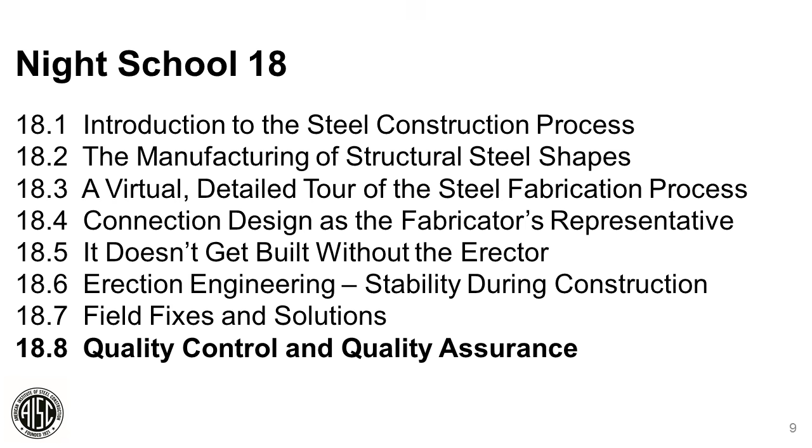One thing that really struck me is this is the last session, Quality Control and Quality Assurance. This being the last session from the mill to topping out, it struck me as unusual. Then I looked further at the AISC specification for steel buildings, AISC 360, and I looked at all these chapters and design requirements, starting with general provisions and design requirements, design for stability, design for members. And the last chapter is quality control and quality assurance.

So I wondered, why is this last? I gave it some thought, and I said, whenever you're doing something and reviewing it, usually the thing you remember most is the thing you cover last. So maybe that's why we're doing this last, so you'll remember it first when you're working on a job. Also, why is it last in the specification? So you'll remember it first whenever you're thinking about anything on a job. You'll remember quality is the most important thing. You'll also remember that steel is a very high quality product. It's the highest quality construction material on the market, fully controlled, as you've learned, from the mill through topping out.

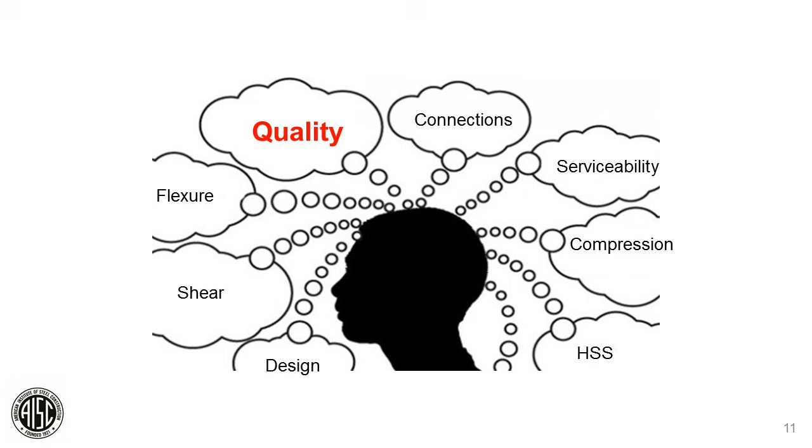So the plan for today is we're going to go through two parts. Part 1 is Demystifying Chapter N in the Building Code. Part 2 is applying Chapter N to statistical improvements. In Part 2, I'm going to show you some ways it's been applied in a fabrication shop and for erection, and how it can be used to improve quality in those areas as well.

But let's start with the first part, Demystifying Chapter N in the Building Code. Before we start, though, I want to go through what most people understand is the typical inspection process that takes place on a job site for structural steel.

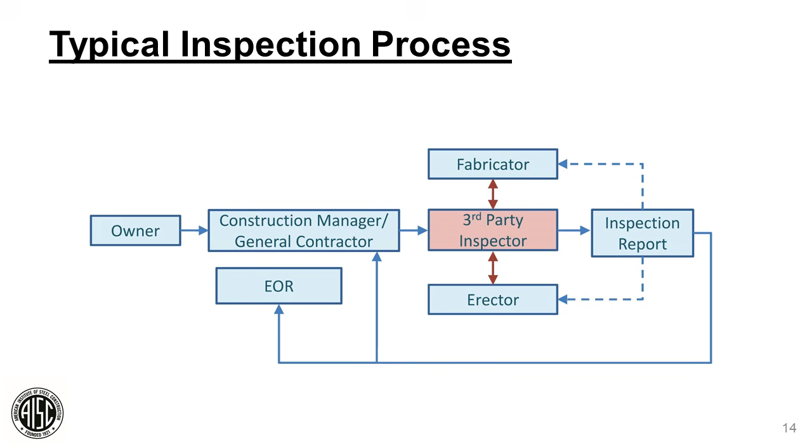So without any further ado, let's get into Demystifying Chapter N. What we're going to cover in this section is why this was added to the AISC specification, what is the source of these quality requirements for fabrication and erection, and what is the difference between quality control and quality assurance. What does perform and observe mean in Chapter N? And how does all of this relate to the International Building Code?

So why was this added to the AISC specification? Well, it was added to provide guidance of items to be listed as special inspection items and to assure consistent quality of structural steel for fabrication and erection. It also required documented quality programs from all fabricators and erectors.

So what was the background? Well, if we go back and look at the AISC specification, also look at IBC 2009, the section on special inspection in Chapter 17 had 20 pages with significant references to outside documents for special inspection.

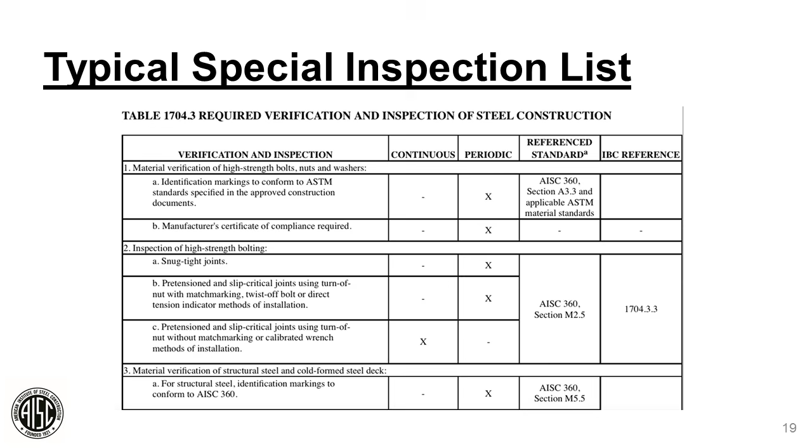This other set of drawings was pretty similar to what you just looked at. Same list, verification inspection items on the left, continuous periodic reference standards, and you're going to see all those AISC references we talked about previously, AISC 360, section M2.5, A3.3, M5.5, ASTM standards, and IBC references over on the extreme right-hand column.

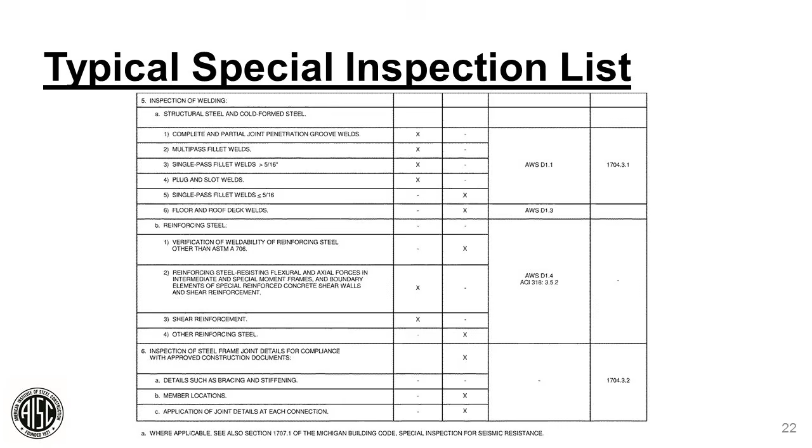Continuing on with inspection of welding, you'll see AWS references there for D1.1 and D1.3, also D1.4. You'll see that referenced as well, and the IBC references.

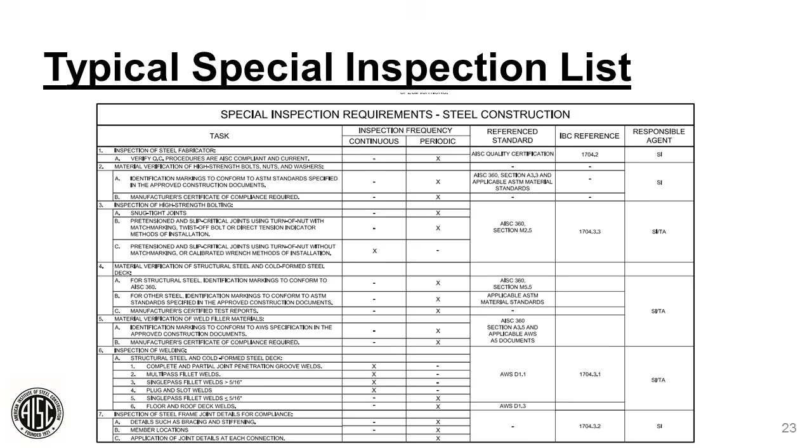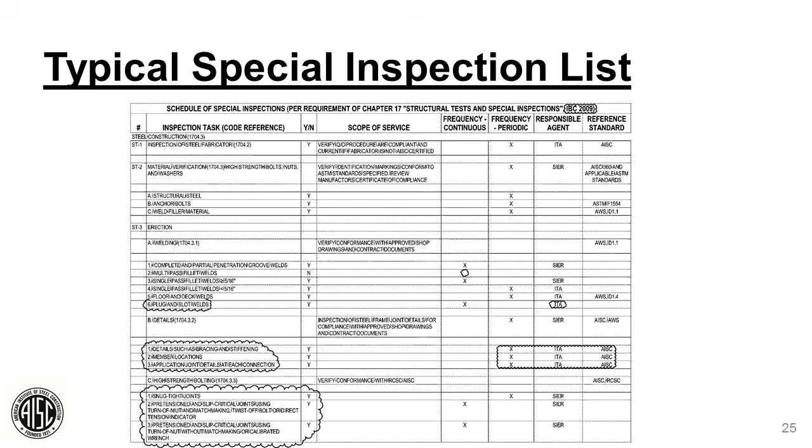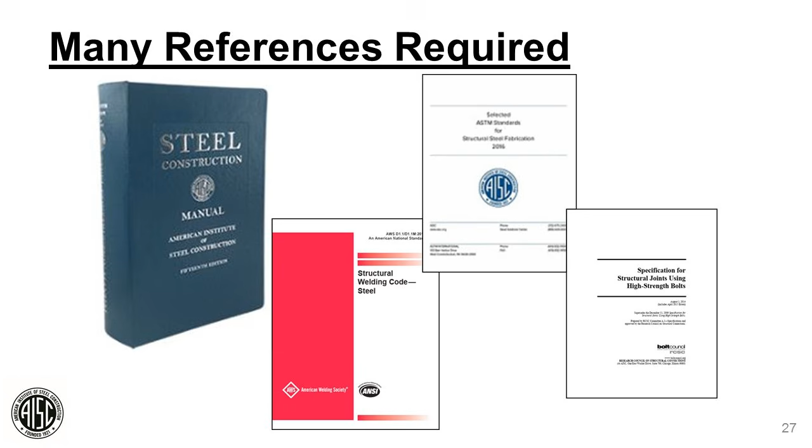So why was it added to the AISC specification? To provide guidance of items to be listed as special inspection items. So now, instead of looking at all that documentation we just looked at previously, instead of all of those, all you have to do is look at the AISC specification and Chapter N. All the references you need for inspecting for quality control and quality assurance for structural steel are in one location, Chapter N.

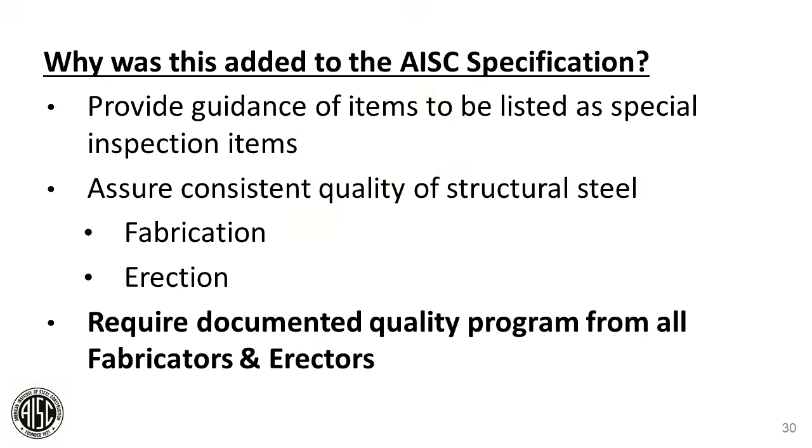It also was added to require documentation for quality programs from all fabricators and erectors. So every fabricator and erector now will have to have a quality control manual of some sort. These can be in many different formats, could look different at every company, but every fabricator and erector must have a quality control manual to say how they control quality in their shop and in the field.

So the driving question is, what was the source of everything in Chapter N? Where did this all come from? Was this all new? Well, the key to this lies in the tables.

When you start to look at the tables, you're going to see tables for inspection tasks prior to welding: welder qualification records, continuity records, WPS available (welding procedure specification), manufacturer certifications for welding consumables available, material identification, fit up of groove welds. Continuing on to inspection tasks during welding, you're going to see all these items listed as quality control and quality assurance items with either an observe or perform.

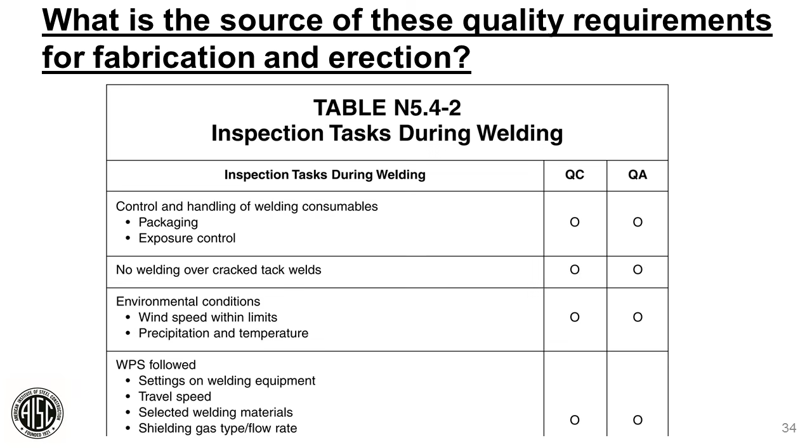Then inspection tasks after welding: welds cleaned, size, length, and location of welds, welds meet visual inspection criteria. This is all listed clearly in Chapter N. But where did this come from?

Well, the key is to look at the commentary. When you go back and look at the commentary for table N5.4-1, you're going to see that all of those things listed were taken from AWS D1.1. Welding procedure specifications, WPS available, is in clause 6.3 of AWS D1.1. Manufacturer certifications for welding consumables available in 6.2. Material identification in 6.2 as well.

Continuing on for clauses for inspection tasks during welding, you can see use of qualified welder, 6.4, control and handling of welding consumables, 6.2, and no welding over cracked tack welds, 5.17. They're all listed here. This is nothing new. These are items that were always supposed to be inspected while welding.

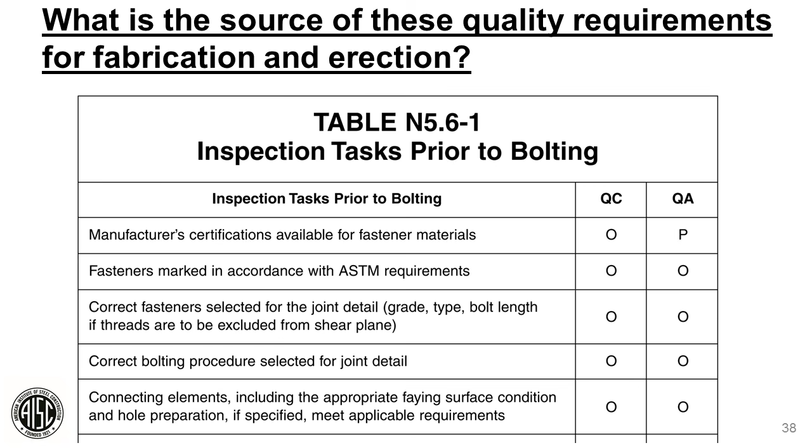Also, when you're looking at inspection tasks prior to bolting, you're going to see similar things: manufacturer certifications for available fasteners, fasteners marked in accordance with ASTM requirements, correct fasteners selected for joint details. Those were all taken from the RCSC specification for high-strength bolting, and you can see the sections that were referenced here.

Manufacturer certification available for fastener materials is in 2.1 and 9.1. Fasteners marked in accordance to ASTM requirements were in certain figures, in 2.1, figure C2.1 and 9.1. Everything is listed. Everything was taken from somewhere else. Now it's in one location, easy for everybody to find instead of using all those other references.

So let's go into this a little more detail. Let's look at how this would be applied. How are these inspection tasks performed? Let's look at groove welds.

If you look at groove welds, it's an observed task. You have to look at joint preparation, dimensions, alignment, root opening, root face bevel, cleanliness, condition of steel surfaces, tacking, backing type, and fit if applicable. Really, it's a simple situation. You look at your groove weld, how it's prepped. You can take measurements of that groove weld and make sure it meets the criteria of the welding symbol shown in the drawing. It was prepped properly before welding begins.

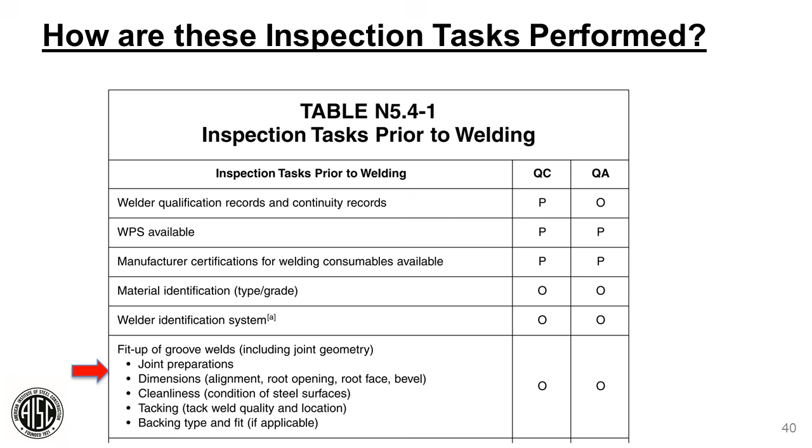So it's an inspection task before welding. If you go back and look at that again, it's just looking at these items listed on the bottom when you're looking at this joint. It's that simple.

Inspection tasks during welding are all observed. These can be observed during welding. So you have to look, making sure they're following the proper welding procedure specification, the WPS, settings on welding equipment, travel speed, all these items.

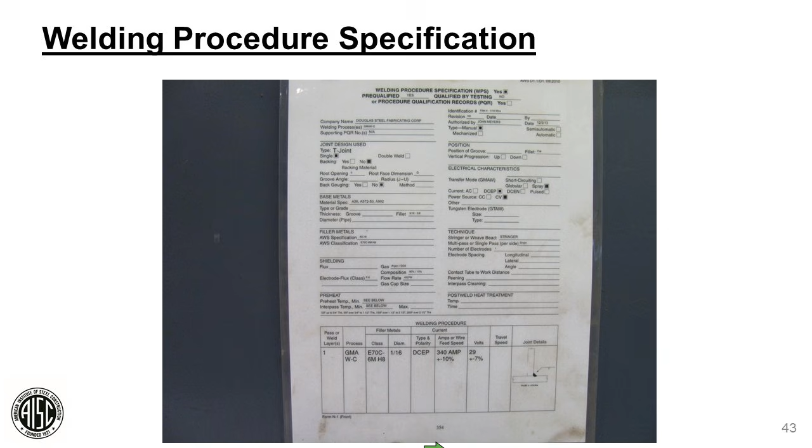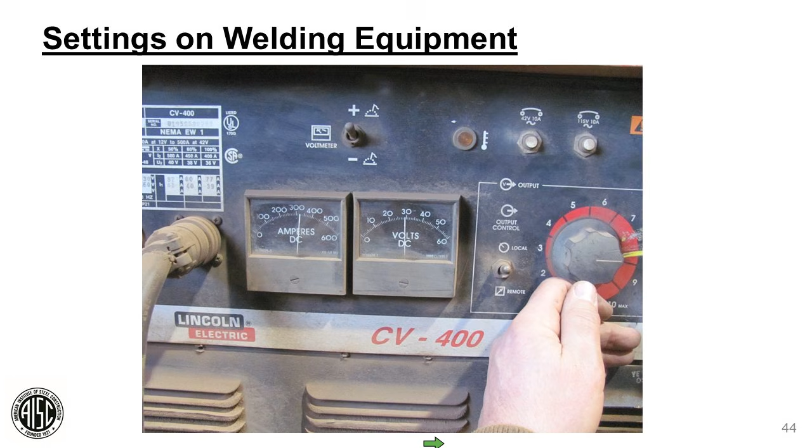Once it's filled out, every welder wants to make sure they follow all the procedures spelled out in this welding procedure specification. For example, setting the welding to the proper setting, the proper amperage is set for welding, making sure that's done properly.

Inspection tasks after welding. What do you look for at a weld after it's done? Keep in mind, not every weld is non-destructively tested. Fillet welds can be inspected visually. There is some non-destructive testing that can be done on fillet welds, but most commonly, most problems with fillet welds come out visually. For example, welds meet visual acceptance criteria.

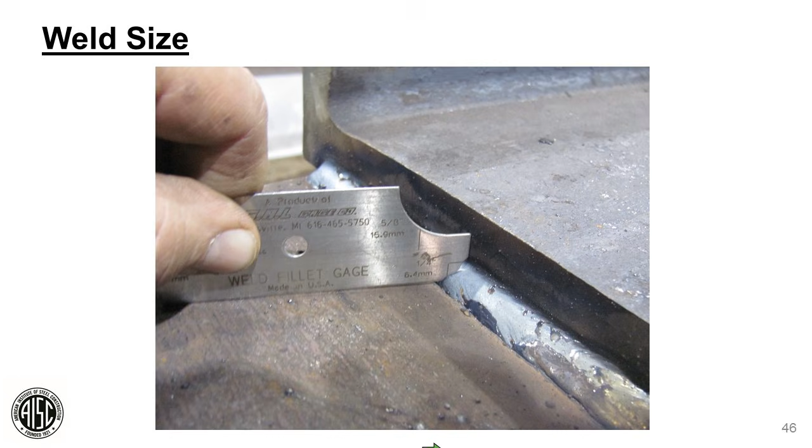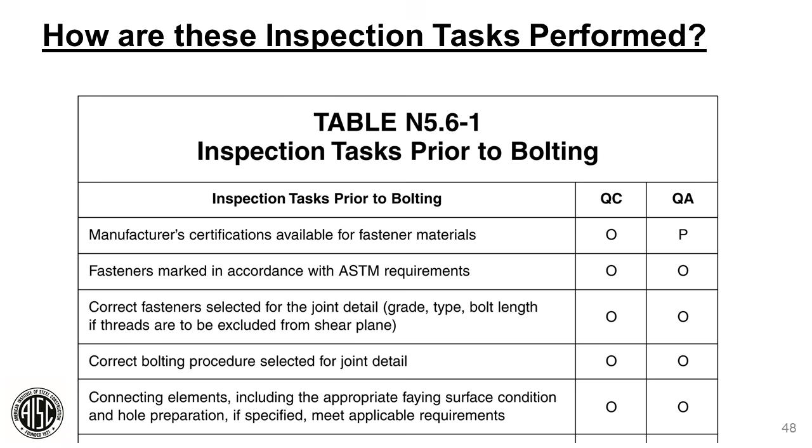Bolting. There are inspection tasks prior to bolting, and you can see there are issues here. Fasteners must be marked in accordance with proper ASTM requirements, and the correct bolting procedure must be selected for the joint detail.

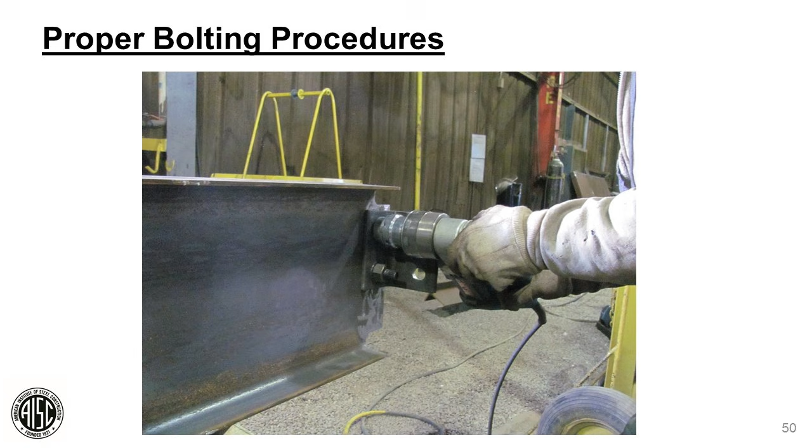So you see if proper bolting procedures are being used, and proper bolting guns are being used to tighten these bolts, you make sure that's being done.

I also want to go over pre-installation verification testing. This is required by the RCSC specification for high-strength bolts. It is required that you test 3 bolts from every lot of bolts. Now that doesn't mean 3 bolts from every keg. Every keg of bolts is marked with a lot number.

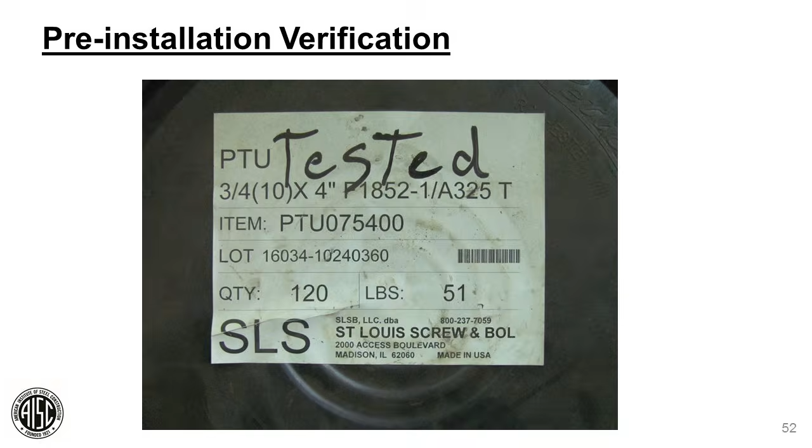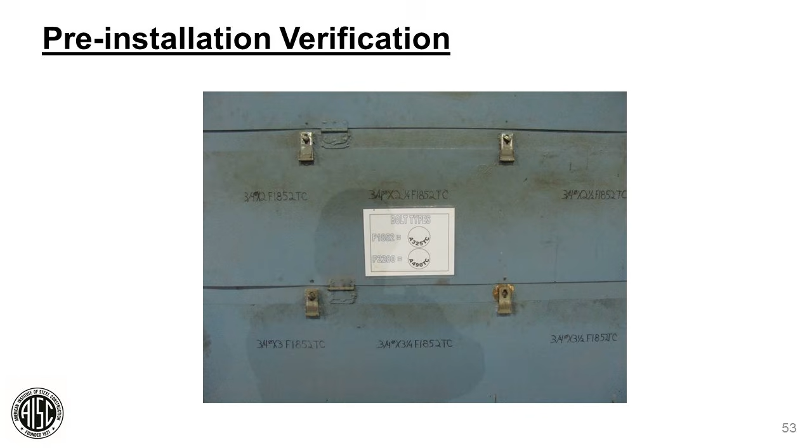When you open that container, you're going to see the bolts are in there, and take note, the lot number is listed right there. So you will be able to tell right away that it has been tested - it's tied to the lot number. These aren't just random bolts that are dropped in here.

So let's look at pre-installation verification as it's listed in RCSC. Section 7.1 is a tension calibrator. A tension calibrator shall be used where bolts are to be installed in pre-tension joints and slip critical joints. Keep in mind it's only in pre-tension joints and slip critical joints, to confirm the suitability of the complete fastener assembly, including lubrication for pre-tension installation, and to confirm the procedure and proper use by the bolting crew of the pre-tensioning method to be used. So a tension calibrator must be used for pre-installation verification testing.

But I wanted to show you that in the commentary for Section 7.1, it states direct tension indicators, DTIs - those are the washers with the little bumps on them - may be used as tension calibrators, except in the case of turn-of-the-nut installation. This method is especially useful for, but not restricted to, bolts that are too short to fit into a hydraulic tension calibrator.

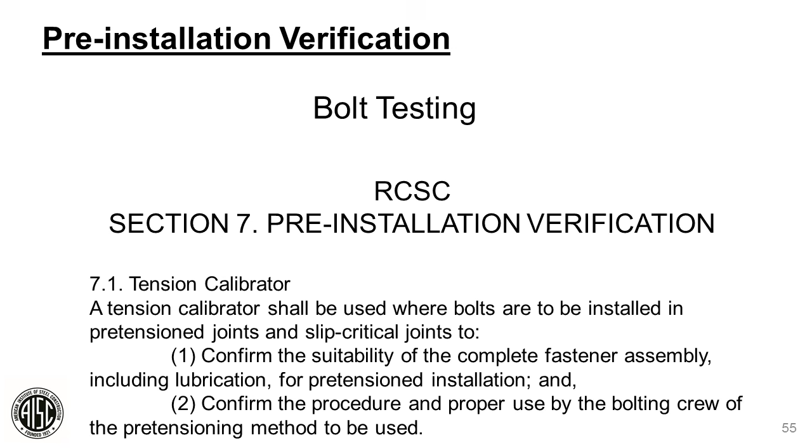So what is the advantage of this? Let's go back and look at this slide. It states a tension calibrator shall be used where bolts are to be installed, meaning on every job site you would need a Skidmore-Wilhelm device as a tension calibrator. But by this commentary, you may be able to use direct tension indicators instead.

Direct tension indicators are produced exactly the same as bolts, in lots. So what would you do? If you took a lot of DTIs, pulled 3 out of that lot and tested them in your Skidmore-Wilhelm device to make sure they got up to the proper tension, they can then be used as a tension calibrator on your job site. It saves you from having to have a Skidmore-Wilhelm device on every job site.

Skidmore-Wilhelm devices have to be calibrated. They get knocked over, they get damaged. This prevents that from happening on a job site.

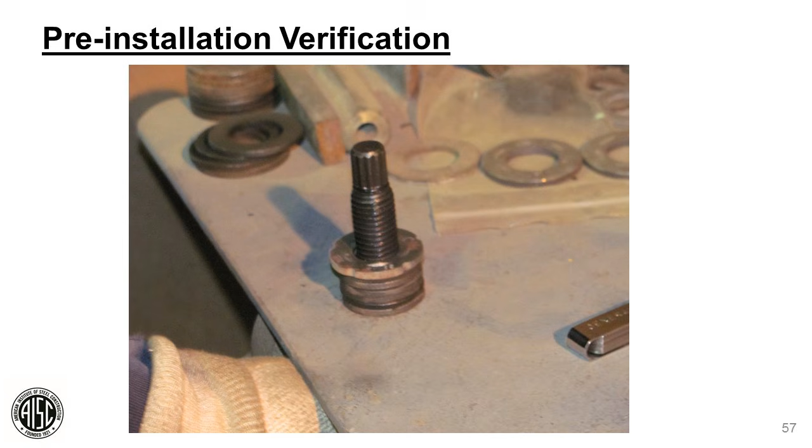So how would you use this? It's actually very simple. You take your bolt and put it through a plate. There's a stack of washers to take up the shank of the bolt, the unthreaded part. The DTI is placed on top of that stack of washers, another washer is placed on top of the DTI, and the nut is placed on. This is taken up to a snug tight condition, and then the bolt is fully tensioned.

Once the bolt is fully tensioned, you check it with a feeler gauge. The feeler gauge requires refusal of, I think, 5 thousandths of the thickness of that gauge, at least 3 points along that washer. If you get refusal at 3 points, that bolt has reached the proper tension. You've just done pre-installation verification testing for one of the bolts with a DTI instead of a Skidmore-Wilhelm device.

I want to point out this method is permitted, but it's not clearly defined unless you read the commentary. But you can still use a Skidmore-Wilhelm device if you like.

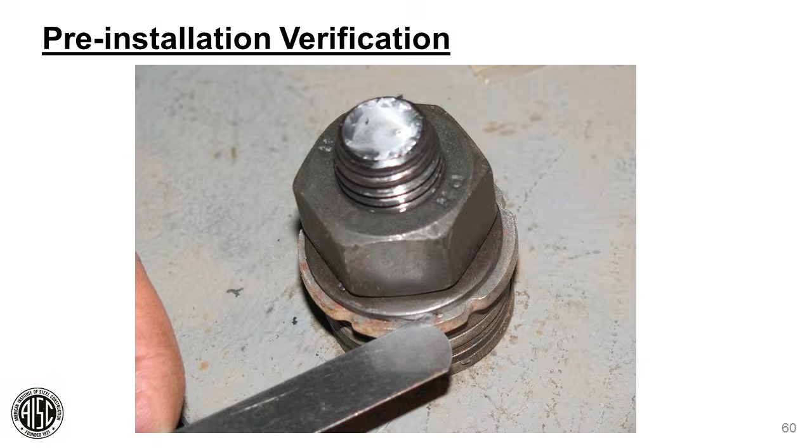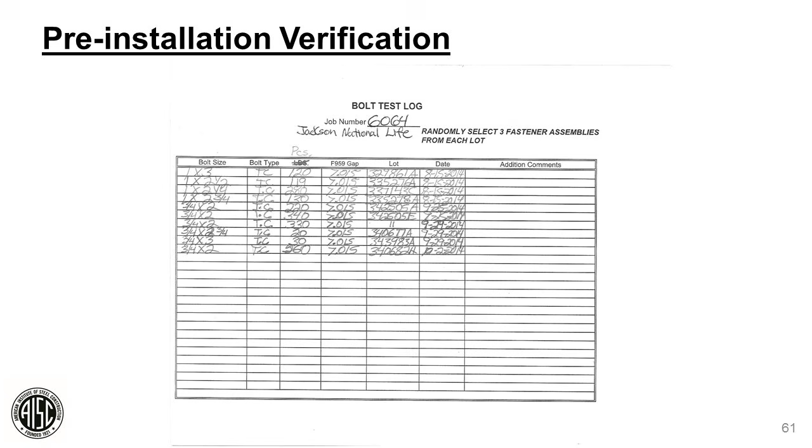So what does it look like? It's pretty simple. If you look at this test log, you'll see the bolt sizes listed here, the gap listed here, and it met the requirement. The lot numbers are listed in this column. It's just a simple log showing every 3 bolts from each lot were tested and met the proper tension requirement using the DTI.

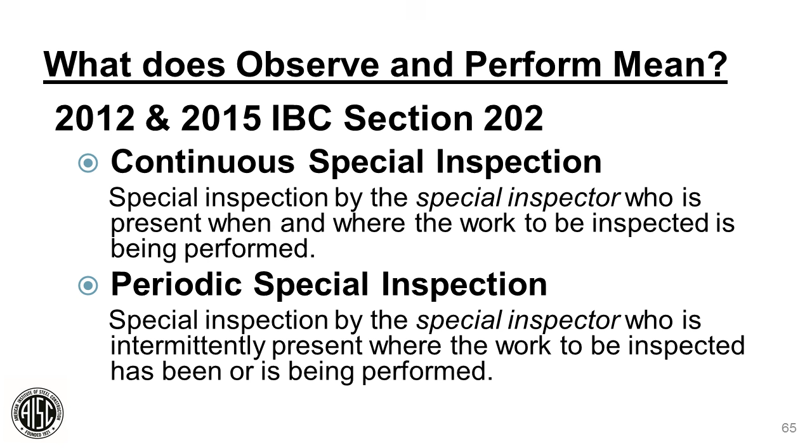If we look at observe, what does perform and observe mean? In 2012 IBC and 2015 IBC, continuous says it has to be on-site, and it references codes such as AWS D1.1, but not every task on every weld.

AWS D1.1, Clause 6.5.2, Scope of Examination, says the inspector shall, at suitable intervals, observe joint preparation, assembly practice, the welding techniques, and performance of each welder, welding operator, and tack welder to ensure that the applicable requirements of this code are met. In Chapter N, we label these as observe — at suitable intervals, observe.

AWS D1.1 in Clause 6.5.3, Extent of Examination: the inspector shall examine the work to ensure that it meets the requirements of this code. Size and contour of welds shall be measured with suitable gauges.

Chapter N labels these as perform. These must be done. You have to measure the size and contour of those welds, so those are perform. When you look at the previous one, it was at suitable intervals, that was just observe. This one is perform. You have to perform those measurements with gauges.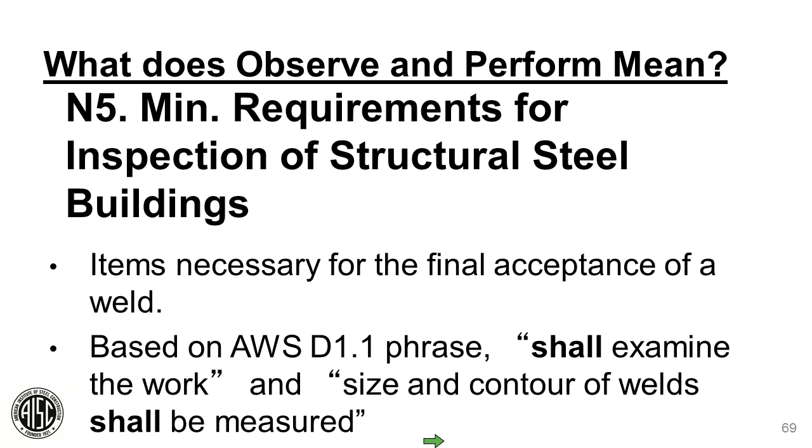RCSC is similar in Section 9. When inspection is required in the contract documents, the inspector shall ensure while the work is in progress that the requirements of the specification are met.

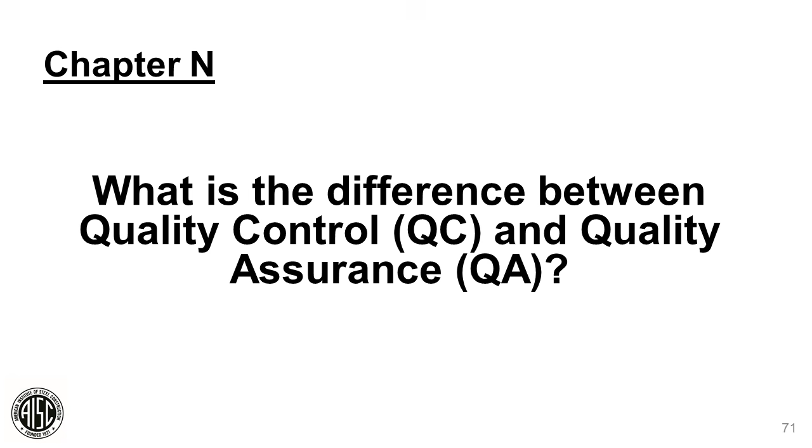So the question comes up, we have quality control and quality assurance. What's the difference?

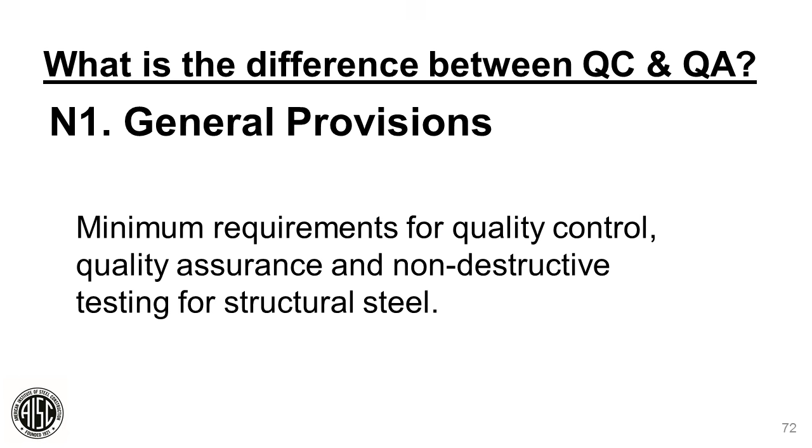Well, let's go back to section N1 of the AISC specification, general provisions. What I want to clear up is what you see in Chapter N are minimum requirements for quality control, quality assurance, and non-destructive testing for structural steel. So it's just quality control and quality assurance minimum requirements. You can have more, but these are the minimum requirements that everybody must comply with.

Generally, quality control is provided by the fabricator and the erector. They will control the quality of the product in the shop and the quality of the product in the field. They are controlling the quality.

Quality assurance generally is provided by others as required by the authority having jurisdiction, the applicable building code, or the engineer of record or the owner. So quality assurance assures the quality was met. Quality control controls the quality as the steel is being fabricated and erected. Those are the differences between the two.

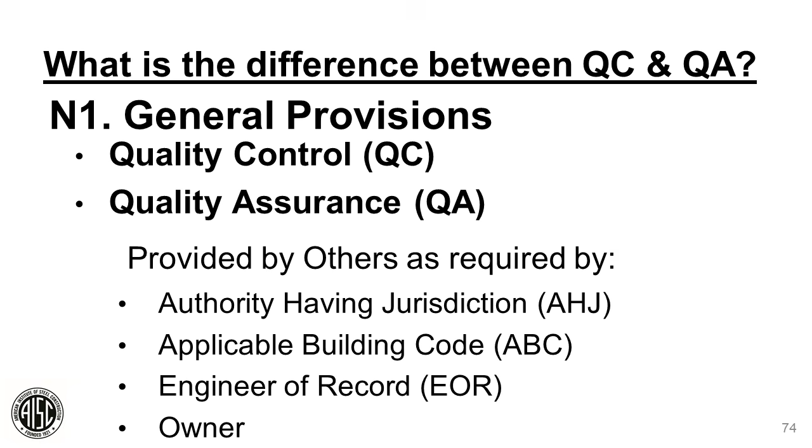Non-destructive testing is usually performed by the firm responsible for quality assurance. There is an exception in section N6. We'll get into that exception and describe very clearly what that exception is. But as a general statement, non-destructive testing is performed by the firm responsible for quality assurance. Keep in mind, not every weld needs non-destructive testing. Some of it can be done visually.

Section N2 talks about the fabricator and erector's quality control program. So if a fabricator and erector is going to perform quality control, what needs to be in their quality control program? They have to have procedures and inspections. How do they perform work in accordance with the AISC specification and the construction documents?

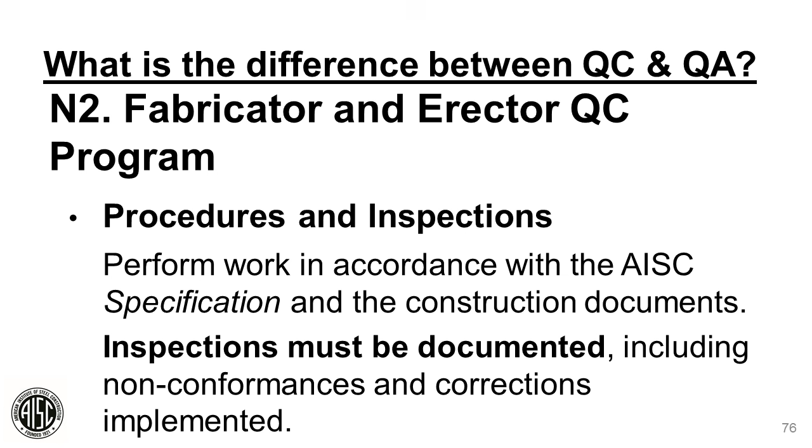All inspections must be documented, including the non-conformances and the corrections implemented. If an inspection hasn't been documented, it hasn't been performed. There is no way to ensure the inspection was done if nobody documented it. You have to be able to document your inspections. So somewhere in that quality control program for the fabricator and erector, the inspections they perform to control their quality must be documented.

Also, there's a section on material identification. They have to have a procedure to identify material. It has to comply with the Code of Standard Practice, section 6.1, and be monitored by the fabricator's quality control inspector. There has to be a person or persons identified in the fabrication shop to control quality. How are they monitoring that the proper material is being used? Again, the inspections must be documented.

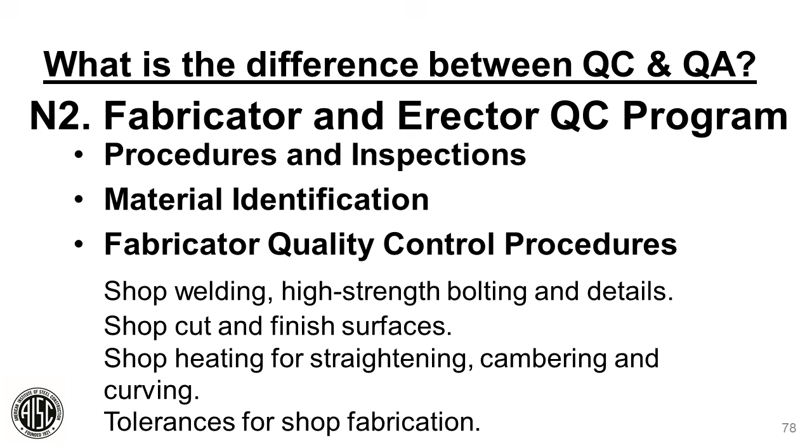So what are some of the things that might be listed in a fabricator's quality control procedures? Shop welding, high-strength bolting and details, shop cut and finish surfaces, shop heating for straightening, cambering, and curving, and tolerances for shop fabrication. All of these are clearly spelled out in the AISC specification, the Code of Standard Practice, and other references we mentioned, but now it's all in one place. Chapter N has all those listed. But you have to have specific procedures in a fabricator's quality control program. They have to explain how they're going to do this.

The erector quality control program is relatively similar, very similar items, except they're done in the field.

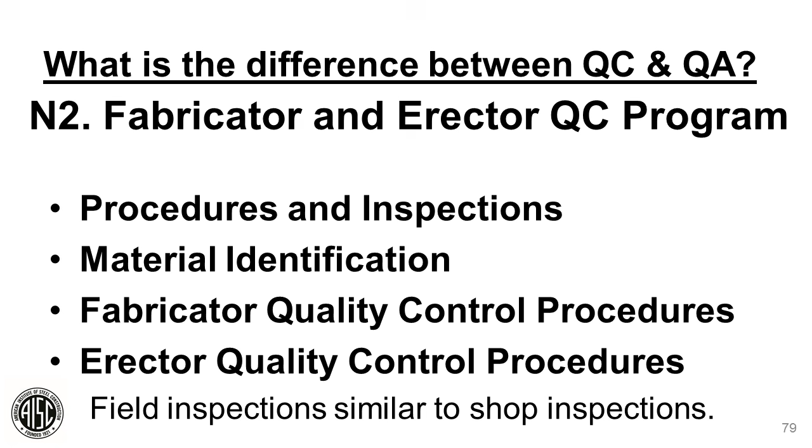So section N5.1 deals with quality control. Basically, the tasks are listed in the tables. Remember those tables we talked about previously? Every task is listed there to make sure the work is performed in accordance with the construction documents.

Now, quality control is done by looking at shop drawings and erection drawings and the applicable reference specifications, codes, and standards. So you're saying, well, wait a second, we're only looking at shop drawings and erection drawings? Well, the shop drawings and erection drawings were approved by the engineer of record, and they are being used to fabricate or erect the structural steel. Why are we only using those at this point?

We're using those plus the applicable reference specifications, codes, and standards, because if you look at any design drawings, you're not going to see every detail for every joint, every weld that has to be applied, all the specialty items, the bolts that have to be used. All those are spelled out clearly on the shop drawings and erection drawings, but they aren't always spelled out on other drawings. So these are used to perform quality control in a shop and in the field.

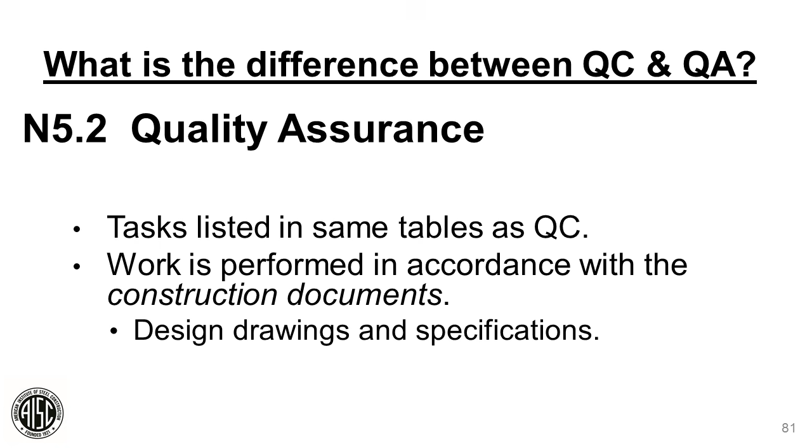Now, quality assurance uses those same documents and same tables we just talked about, but it also uses the design drawings and specifications. That is an extra check to make sure that all the information in the design drawings and specifications was transferred to the shop drawings and erection drawings, so the proper information was used during fabrication and erection. That is assuring the quality was done properly. That's why this is quality assurance, and it uses other documents.

Section 5.3 talks about coordinated inspection. In this case, the same task can be performed for quality control and quality assurance. Inspection may be performed by one party only, either the quality control inspector or the quality assurance inspector. But if it's a quality control inspector, that procedure must be approved by the engineer of record and the authority having jurisdiction. The building code official and the engineer of record must say that the inspections performed in quality control meet the same criteria as quality assurance, and accept those inspection reports rather than having a third party do those inspections. So you have to have confidence from reviewing the quality control procedures that the fabricator and erector produced, that their outlined procedures will meet the quality you require on the project. But that is permitted. The coordinated inspection is permitted.

So how does this relate to the International Building Code, IBC? Well, if we look at section N6 of the AISC specification, it talks about approved fabricators and erectors.

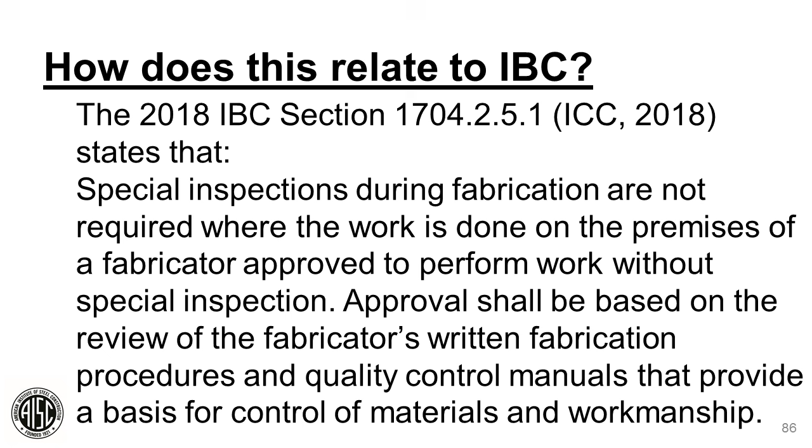So if you look at the 2018 IBC, section 1704.2.5.1, it states special inspections during fabrication are not required where the work is done on the premises of a fabricator approved to perform work without special inspection. Approval shall be based on review of the fabricator's written fabrication procedures and quality control manuals that provide a basis for control of materials and workmanship. So if you review the fabricator's quality control manual and observe some of the procedures they're using, special inspections can be waived at that point, and quality control inspections will be sufficient.

The 2018 International Building Code requirements for special inspection of structural steel states in section 1705.2.1 that the requirements for special inspections are to be performed in accordance with Chapter N of AISC 360. So you realize steel is the only material that doesn't have a list of items that must be inspected for special inspection in IBC. All IBC says is follow Chapter N inspections, and you meet all other requirements for special inspection. So steel is the only material - all other materials have lists of items in IBC.

So what does a coordinated inspection look like?

It's going to be very similar to this. Owner still hires a construction manager or a general contractor. The construction manager or general contractor will then hire a fabricator and erector who will do their own quality control and quality assurance. Now, as I told you, every inspection must be documented, so there is an inspection report for every inspection. Those inspection reports can then be given to the engineer of record or the construction manager and general contractor, or both, or it could be available for review.

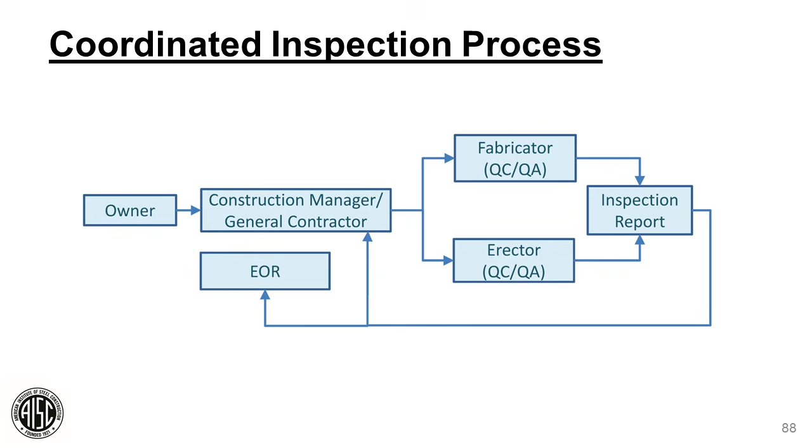Remember, I told you that everything listed for fabrication and erection, the source of all the quality requirements, were items in AWS or the Research Council on Structural Connections high-strength bolt specification. Well, there was one new item added, and I want to show you what it was. There's this item called a welder identification system. That is not required by AWS, but we thought it was important to add.

Why was it important to add? Well, if you have a welder performing welds, and you're inspecting his welds, and you find a problem, you would like to know who did that weld, who performed that weld. You would like to know maybe that person needs more training, or maybe if it's severe enough, maybe that person shouldn't be welding anymore. But if you have their initials or their identification, you will be able to tell who that was and understand if that person has a problem with welding.

So how was it done? As Brent told you, I had been at Douglas Steel for over 30 years, but this is the way we did it there. We had a list of our welders in the shop, and our welders in the shop had a symbol. In this case, you're going to see symbols here, which every welder had, and a number identified that related to their name. It was really that simple. It wasn't more complicated than that.

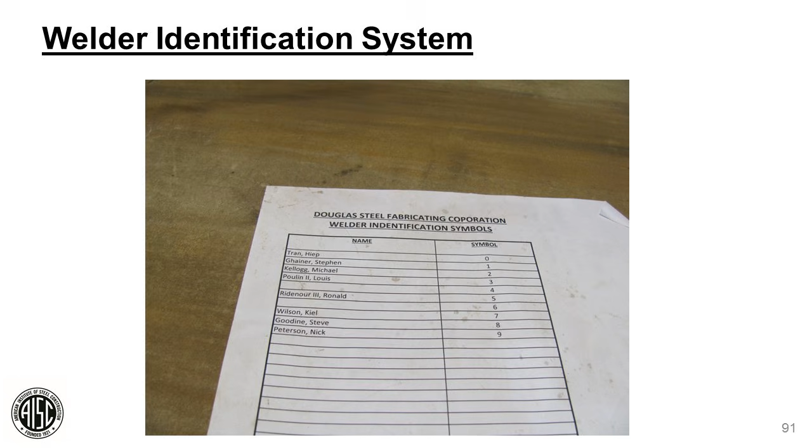We did something very similar in the field. In this case, you're going to see the ironworkers listed on the left-hand side here. There's documentation that they've been trained under certain requirements here - welder qualification training records. There's a record of any training that was done on the job site. They used their initials here as a symbol, rather than a number. That's how they identified things in the field. If you notice this person on the bottom, there's no welding training for this person - the person didn't do any welding.

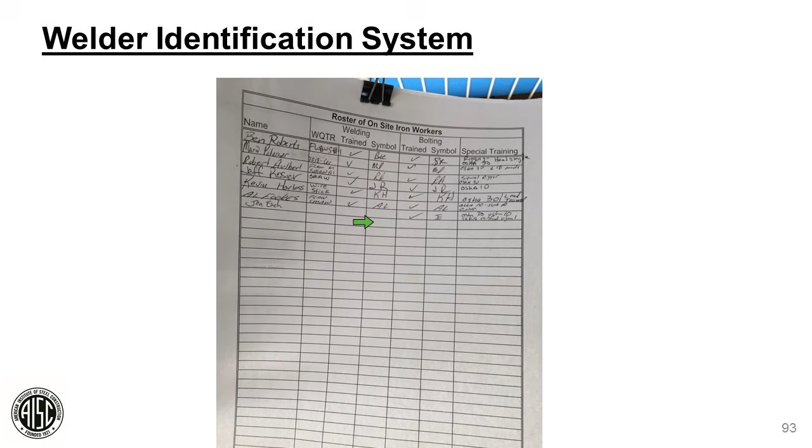I want to show you this, and I want to make this clear: this is not a requirement of Chapter N. Remember, Chapter N covers minimum quality requirements. This is something we did as a fabricator and erector to add an extra level of quality control. We used a bolter identification system, very similar to the welder identification system.

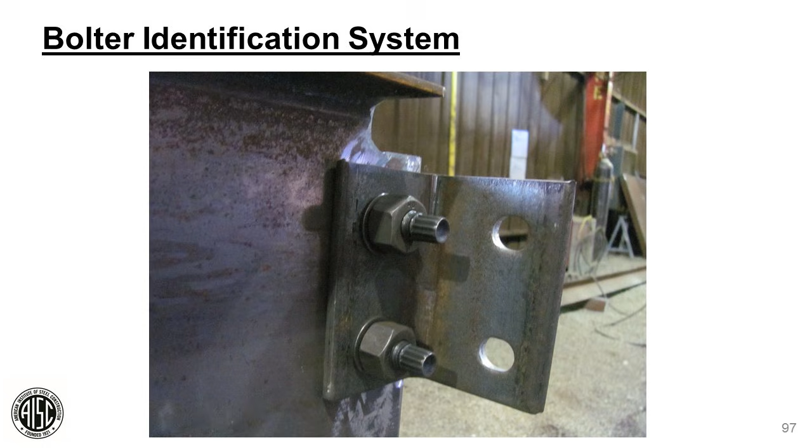This way we know if there are any bolting problems, like loose bolts in the joint. TC bolts have to be installed in a certain pattern and condition to make sure all plies are in firm contact. So if you see a problem where plies aren't in firm contact, meaning there are loose bolts, you want to know who did it so that person can be retrained.

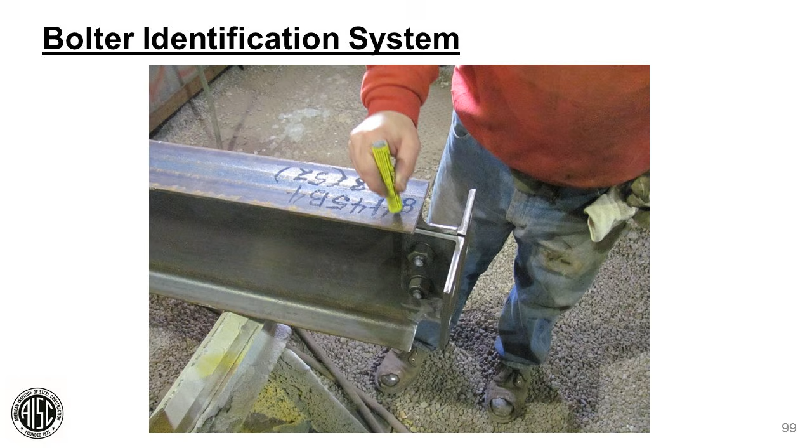We did something very similar in the field. If you look at the center of this picture, you'll see a PM, meaning the person who bolted this joint was PM in this case. As I stated, this bolting identification system is not a Chapter N requirement, it's not required anywhere, but we added it as quality control because we thought it might improve quality, and it didn't take much effort to do.

One of the big questions people always ask is how do I do field inspections. Do I crawl around? Do I have to check every bolt? Do I have to check everything?

If you've used proper training for bolting and done pre-installation verification testing, making sure your people know how to install tension control bolts, you can inspect those pretty much visually. Welds, as I said, fillet welds—if you don't have full penetration welds—can also be inspected visually for size and length, so it doesn't take a lot.

This is sort of like a field inspection report, and it doesn't need to be very complicated. In the first column you'll see an area designated by column grid lines, like AM to AF and A1 to A3. Levels 2 and 3: all pieces installed, yes. Bolts installed per procedures, yes. Field welds, all locations detailed, yes. Then who did it, the date it was done, and in the right-hand column, what items were still incomplete and needed to be done.

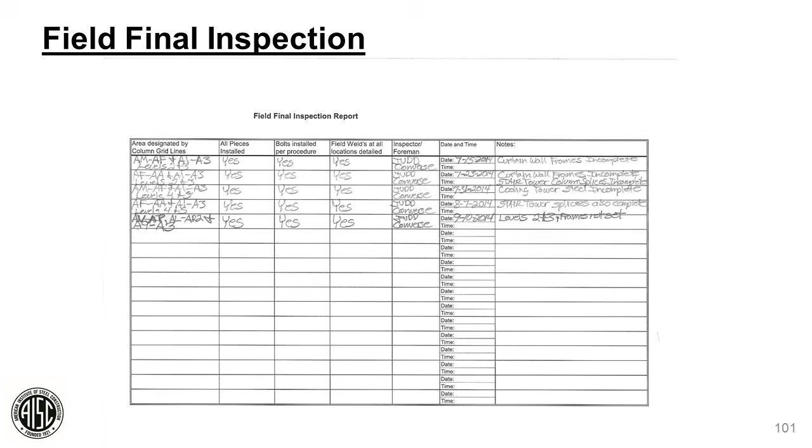Just some things to think about when you're looking at this—it's a very simple way of approaching it.

So let's look at a summary of this section. Why was this added to the AISC specification? It was added to provide minimum quality standards for steel construction and to assure consistently high quality steel construction, all in one location.

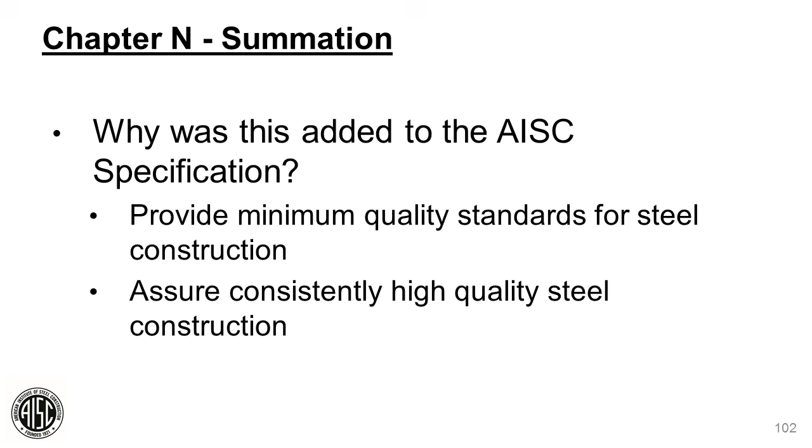What is the source of these quality requirements for fabrication and erection? It's simply listing in one location the requirements of other codes, such as AWS and RCSC, the bolting specification. Only the welder identification system was newly added. That's the source—it was stuff that was always supposed to be done, but now it's in one location and easy to find.

What's the difference between quality control and quality assurance? Quality control is provided by the fabricator or erector. Quality assurance is normally provided by a third party, though coordinated quality control and quality assurance inspection is permitted by the building code.

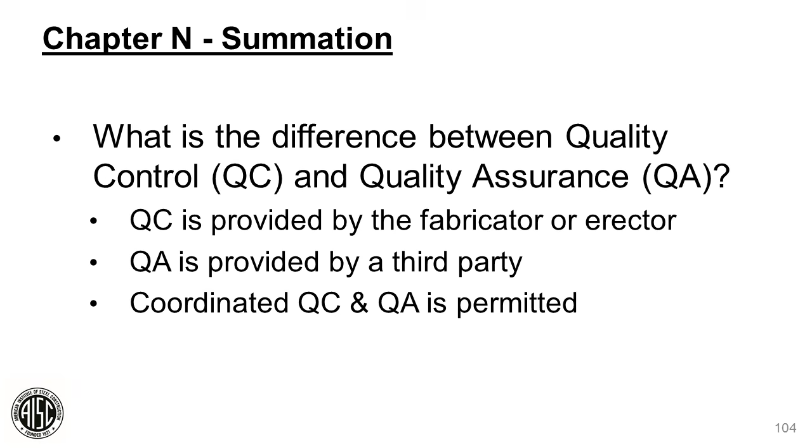What does perform and observe mean? Perform inspections must be done on each joint, each weld, each bolt—everything must be done. Observe inspections must be done on a random basis, not each joint or each bolt, but on a random basis.

How does this relate to the International Building Code? If you look at IBC 2018, it references AISC specification, AISC 360 Chapter N, for all requirements for special inspection for structural steel construction. No other requirements are listed in IBC, just Chapter N. So Chapter N is recognized as the only source for special inspection by the building code.

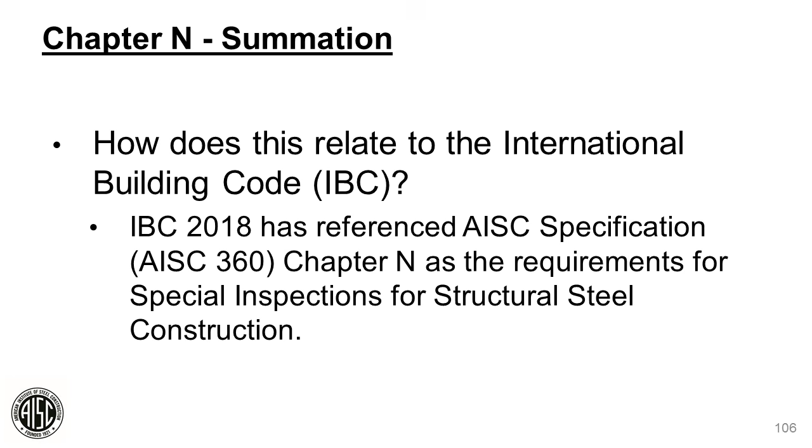Now that we got through that, let's look at some ways you may be able to apply Chapter N and how you can use statistics to improve quality. I'm going to show you some things I had done at Douglas Steel in the past—some ways you may be able to apply Chapter N, and some things you may need to look for.

So what would be in a quality management system? Typically you're going to see specific procedures written for engineering—we're talking about detailing.

You have to see a contract review process, a document control process. How do you control all the design documents that are coming in? How do you control all the documents you're producing? There has to be a procedure. Each one of these requires a procedure.

How do you prepare drawings? This might sound rather simple, but every fabricator has detailing standards, fabrication standards that they try to use. So there have to be drawing preparation procedures.

Some fabricators do detailing in-house, not very many anymore, but if you are subletting detailing to another detailer, those procedures may be different than what you do in-house. How do you pre-qualify them? How do you make sure they know they're following the proper procedures to produce the drawings properly? How are you making sure they are doing what they're supposed to do to make sure their stuff is accurate? What are their quality control procedures?

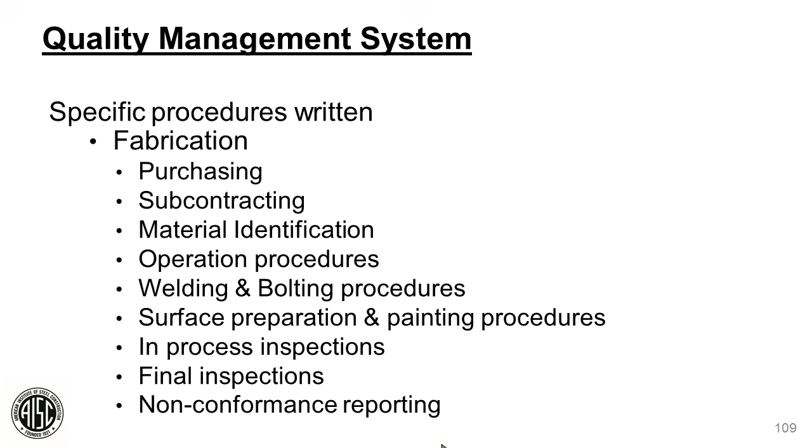Erection. Erection is going to be really similar to what we looked at. You're going to have bolting procedures. How are you bolting in the field? Welding procedures. And this is something that's rather unusual, but it may be something to think about.

Site-specific safety plan and a site-specific erection plan. To control quality, you have to know where your crane is going to sit on the site. You know how to get material into the right location. Well, that's your site-specific erection plan. And how do you perform all this work safely? Well, that's a site-specific safety plan.

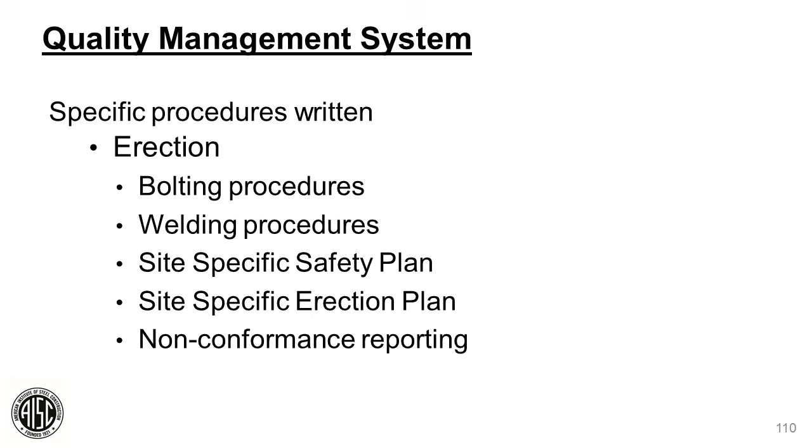Now, you may want to look for these. I'm not going to say the site-specific safety plan and the site-specific erection plan are a requirement in Chapter N. They're not a requirement in Chapter N, but you may want to look at these. You may think these may be good things to have and be able to see in a quality management system for an erector. Also, as in everyone, a non-conformance reporting procedure as well.

So, how did we do it at Douglas Steel? How did we deal with non-conformances? Every non-conformance was submitted and compiled by our engineering department. Why? Well, the engineering department had prepared the shop drawings and the erection drawings and had all the design documents. So they could look through the non-conformances and actually see what took place. They would document the root cause of the non-conformance and share the situation with everyone at our weekly production meetings.

I said, evaluate the root cause, and also determine if there was a quality procedure we had that was broken. Or one of the procedures in our quality manual, was there something that needed to be changed to make sure this didn't happen again? So I'm going to show you some examples of things we did at that point.

This is a rather simple one. If you look here, it's a post-delivery nonconformance. You can see the piece mark 30B4. The right end has 4.5 inches down to the first hole. It should have been 3 inches down to match the girder. It was a detailing error. So how do you fix the problem? The resolution was to field weld the clips to the beam at the correct location. So in this case, it was a very simple problem. It was a nonconformance, and here is the solution. This was reported and documented, as you see here, to everybody at Douglas Steel at the time.

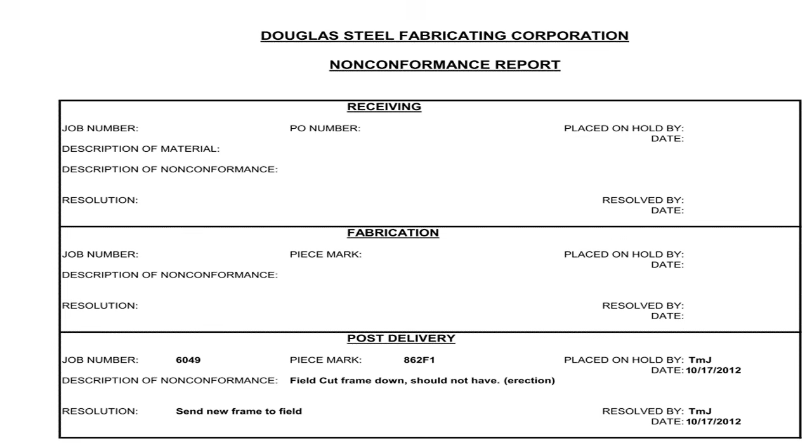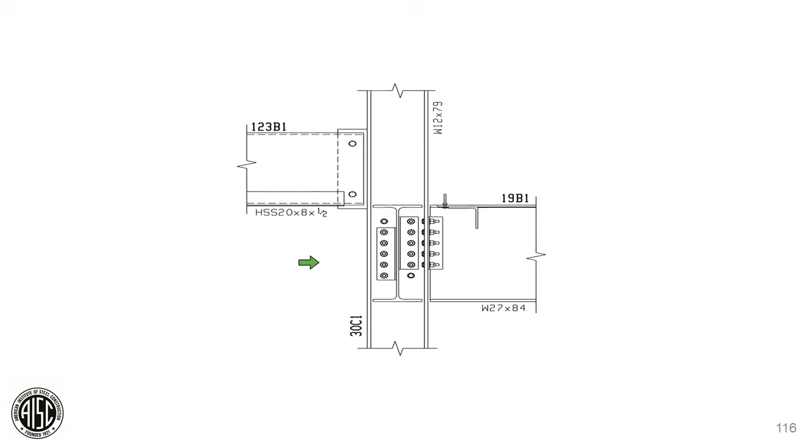This is the detail that was actually on the erection diagram at that point. Now if you look on the left, you're going to see 123B1, and you can see this is an HSS 20x8 by half. In this case, for some architectural reason, the deck was laying on this angle that was welded to the bottom of this HSS. The connection that was used was a plate welded to the column with a slot in the HSS and temporary through bolts being placed, 2 bolts per connection as required by OSHA for erection purposes. That's what was shown on the erection diagram. Actually, the connection was to be welded, but it was not shown.

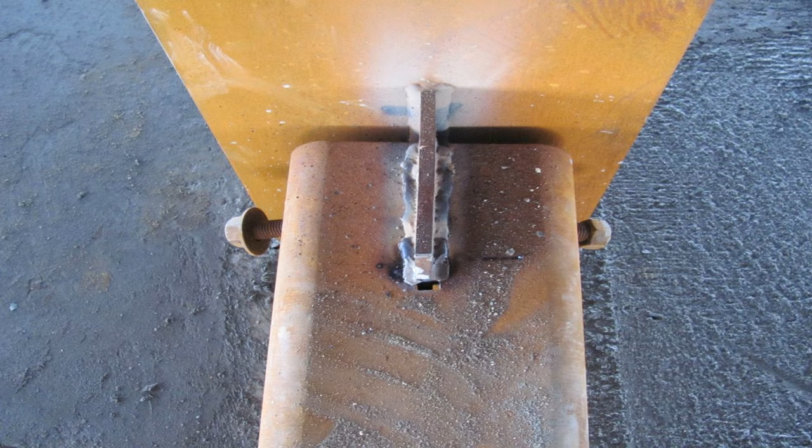That generated not only a non-conformance but a corrective action. We had a problem with the way we were detailing. So you see here it says detailing checking of shop drawings, non-conformance for the month of February. Drawings not prepared in accordance with the project requirements.

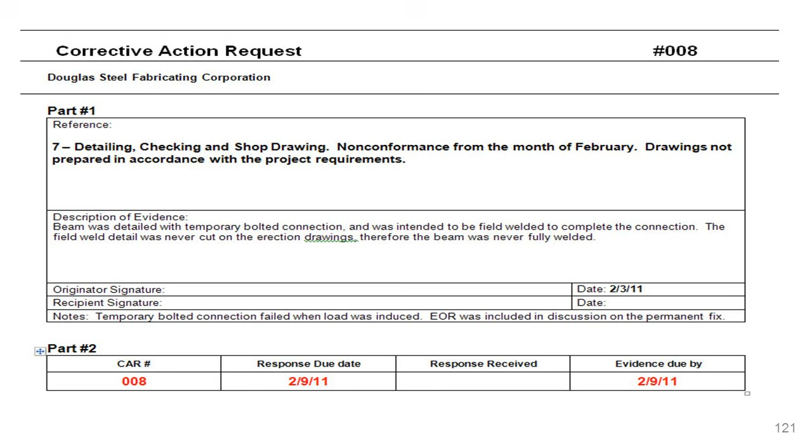The beam was detailed with a temporary bolted connection and was intended to be field welded to complete the connection. The field weld detail was never cut on the erection drawings, therefore the beam was never fully welded. So the temporary bolted connection failed when the load was induced. That was very obvious. This happened in 2011.

So what was the root cause? The detailer did not cut the section to indicate the connection was to be field welded. The checker didn't catch that the field weld was missing. If the checker had looked more carefully, he would have found out that there was to be a field weld there.

So a new detailing procedure was put in place, to add a note to the beam in the model as it's being detailed that a field weld detail will be required on the erection diagram. Also, a detail cut will be added by the detailer to the erection diagram, alerting both the detailer and the checker that a field weld will be required.

So what does that mean? This might be a little confusing. All of our jobs were modeled 100%. Since all of our jobs are modeled 100%, while the modeling is being performed, a note can be added that a field weld needs to be added at this location.

The checker was using the model to check the detail drawings that are being produced. He didn't use the design drawings to see that there needed to be a field weld there. Because the checker was using the model and matched the model to the detail, he never picked up on the field weld.

So the new procedure is the detailer, while the modeling is being done, will put a note that a field weld is required at that location, and there will be a detail cut to show that something needs to be done there. So even if the detailer misses it on the drawing, the checker will have a check to make sure it is not done again. So this was a corrective action.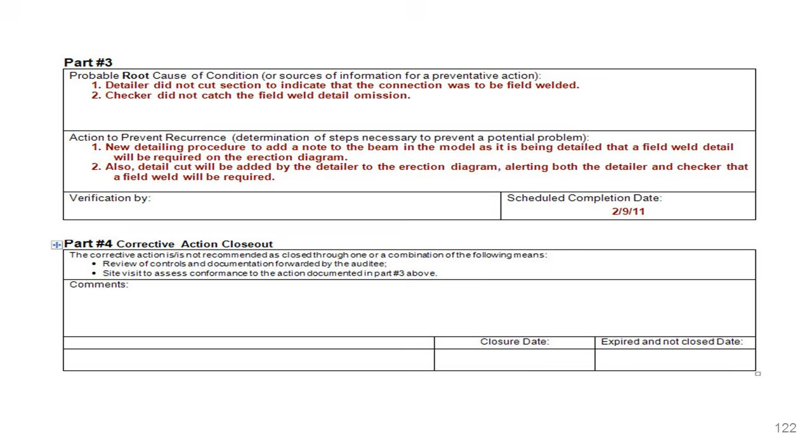So what did that warrant? Well, if you actually look at the engineering standards at that point in time, these were a controlled document. They were issued to everybody who was in the engineering department, and everybody got a controlled copy, and each controlled copy was numbered, issued and approved.

This note, this line, was added to everybody's controlled copy: when detailing a member that requires field welding, place a section bubble cut on the erection view where the welded joint occurs, alerting both the E-view detailer and the checker that the field weld section is required. That simple note was missing previously, and that's why the error occurred. By adding this note, we did a corrective action to make sure that would not happen again.

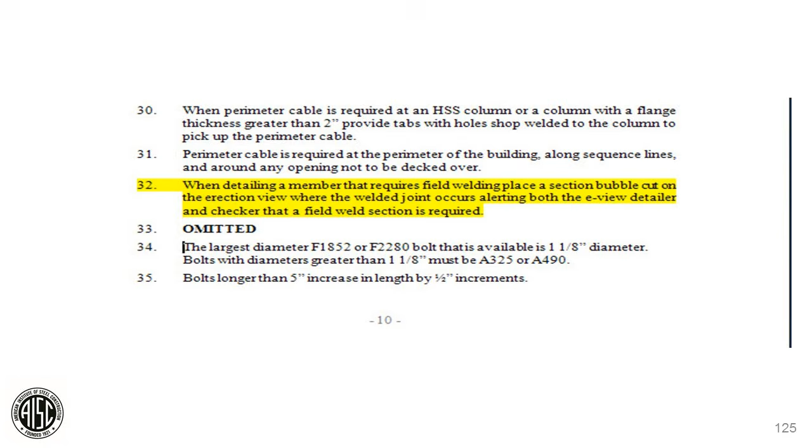This happens to be another situation I wanted to point out to you. This is a little different. This was a job that we were building for another fabricator. He asked us to help him build some beams.

Well, when he went to build these beams, these are the details that went in the shop. You can see there's clip angles on the end, and there's a 5.5-inch gauge. I'll just point this out: these are clip angles on the end, and a 5.5-inch gauge shown in those bolts, and those for the bolts and the clip angle.

Well, again, we had these angles. He gave us the CNC files for our automated equipment. We took the clip angles, and we took the CNC files and put them in our angle line, and this is what the angle looked like. There's no holes in that angle. The clip angle didn't have any holes in it.

So what did that mean? Well, this happened to be done on the night shift. Our night shift foreman looked at this detail and said, oh wait a second.

I see 5.5 inch here. So if I just take that angle and divide that 5.5 by 2, and use 2 3/4 gauge in each leg of an angle, this will work. So he made all the angles, he made the angles and fabricated the steel.

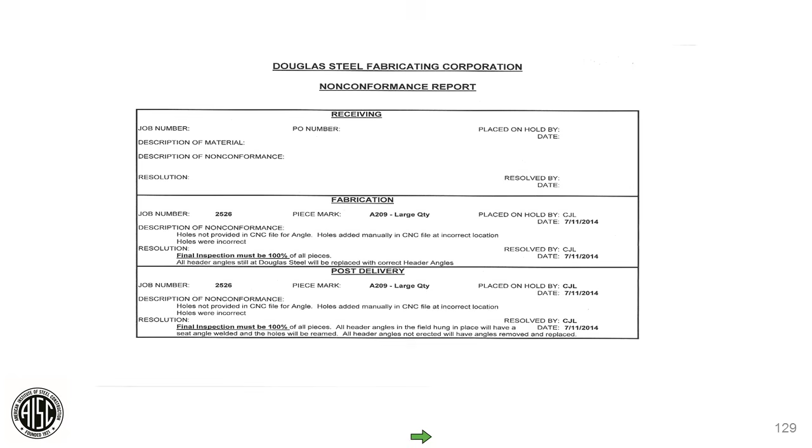So this required a corrective action. There was a problem, an improper fabrication issue. A large amount of angle was provided with improper hole gauge. Original CNC file was provided with no holes, and the hole gauge was added manually at the angle line. This hole gauge was not correct. Angles will need to be replaced.

So what was the root cause? The CNC files were not correct. CNC file was manually adjusted to add holes. Holes were added in incorrect dimension. Angles were welded on in the shop and not caught by the fitters.

The fitters, their last step they should have done at this point is they should have looked at this drawing and measured this 5.5 inch dimension. If they had tried to measure that, they would have discovered that that dimension was not correct. It would have been too large. It would not have worked under those conditions.

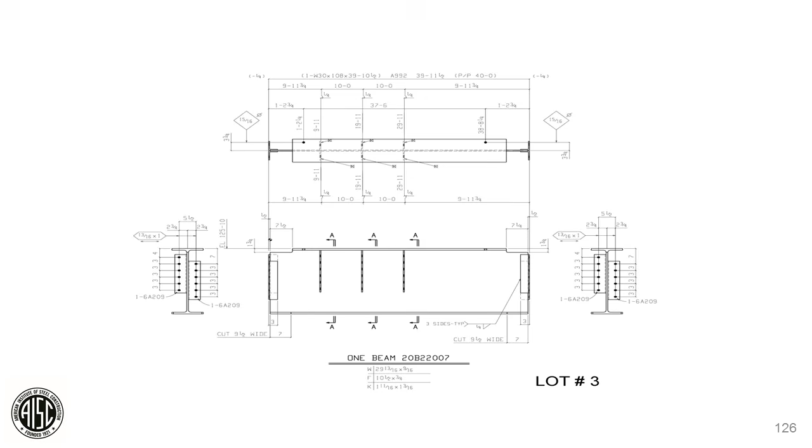So the fitter didn't do what they were supposed to do. Angles were not checked in the final inspection process. There was a mistake made. So we needed some re-education, retraining of the people in the shop.

It says, increase final inspection to 100% for this project. Create a procedure: if any item is not correct in the CNC file, that item may be fixed upon approval from the engineering department. Place the item on hold until the engineering department can be consulted. That was clearly explained to everybody.

Training will be provided to CNC operators to have any fixes to CNC files reviewed and approved by the engineering department prior to being fixed. That is the procedure and correction that was done on this project, so this would not happen again.

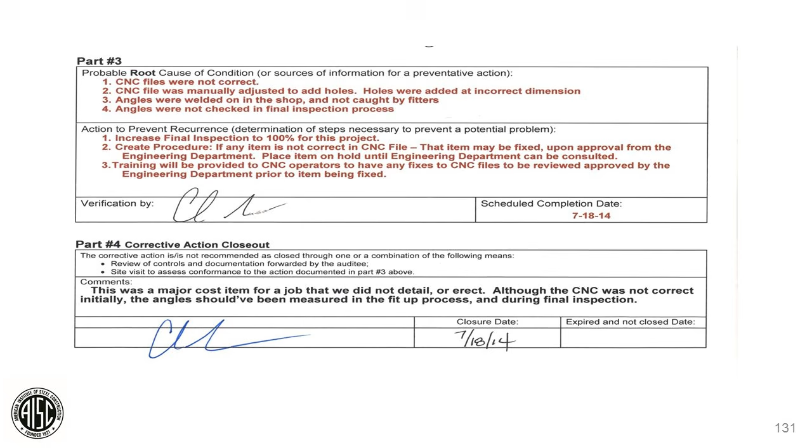I think the situation was the night shift CNC operator was told to get these pieces out that night, and he just hurried up and proceeded without going through the proper procedure to check.

This is a little easier maybe to look at, and I'm actually going to blow this up a little bit as I talk about it to make it even easier to look at. I'm going to show you the top of this. This shows you some totals from statistics for 2014 and 2013. I'm going to point out some things.

If you look at the percentage of nonconformances for each year: in 2013, shop nonconformances were 28% of the nonconformances reported. In 2014, 59%. That's a lot higher. Looks like something's wrong there.

Detailing was at 37% in 2013, 20% in 2014. Sublet detailing was 26% in 2013, 8% in 2014. Well, we must have got rid of a bad detailer that year. That's what it looks like.

Supplier, well, this is nominal, 0 to 1%, pretty small. Field nonconformances, 7% in 2013, 10% in '14. Well, if you look at the field and you look at the shop, you say, is our system working?

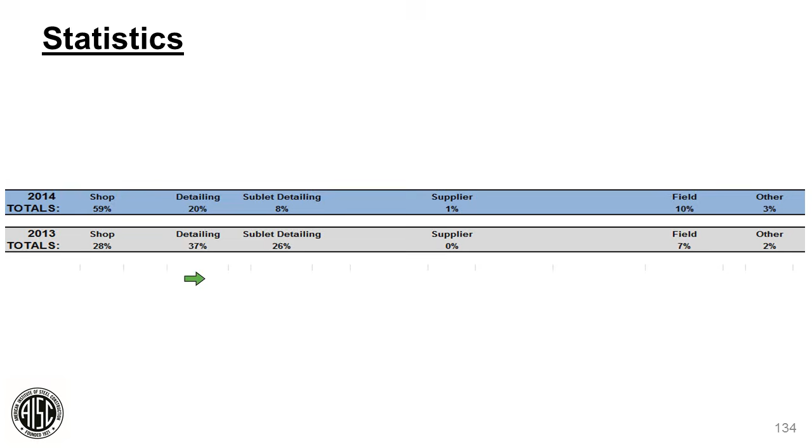So let's look at some statistics. This goes back to 2005 and looks at the number of nonconformances. In 2005, we had 81, and you see numbers starting to rise to a high of 141 in 2012, then drop off a bit. But you can see this number generally getting larger as you go down. Well, why is that getting larger?

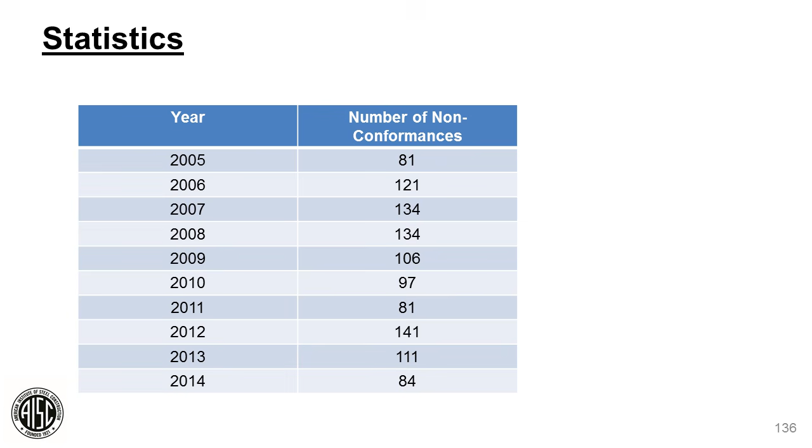Why is that happening? You must have something wrong. If you're getting more nonconformances, your quality program is not working—you're having more problems showing up. Well, that's one way to look at it, but that's not necessarily a good way of looking at it. This is a better way to look at it.

But why did the number of nonconformances get larger? What ended up happening is the people reporting nonconformances realized you're reporting them to improve the system, not to report that somebody has a problem. You're reporting that maybe something else in the system—in the drawings, or in your procedures—is causing those nonconformances, and maybe something can be done to correct them so the number reduces.

But again, when you're around 0.2%, even at 141 nonconformances in 2012, you're doing an excellent job. That means people are more comfortable reporting problems to try to make the system work better. So keep that in mind when looking at nonconformances: a low number does not mean you are doing a good job—it might mean people are not comfortable reporting them.

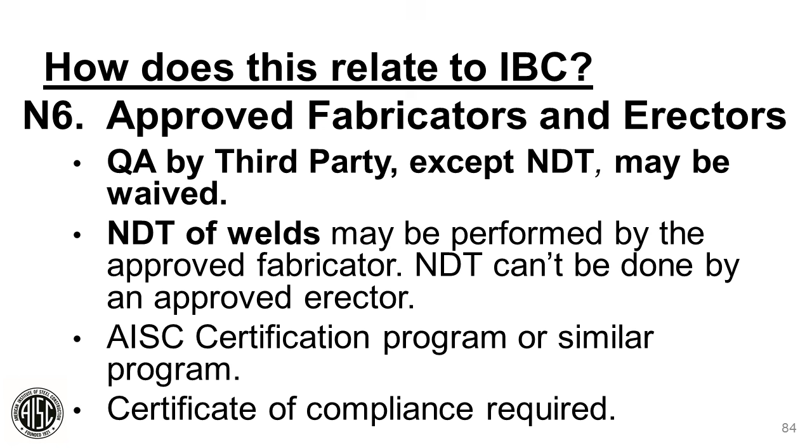Okay, good, those are interesting responses. So let's see how we do on the next question. Pre-installation verification of bolts requires how many bolts per lot to be tested? The answer: 3, 5, 7, or 10.

How many bolts per lot must be tested when it comes to pre-installation verification?

All right, I think we've got everyone's results in that wants to participate. And on this one, Larry, overwhelmingly people said 3. Do you agree? And that is the correct answer. 3 bolts per lot, not 3 bolts per keg, 3 bolts per lot.

All right, very good. With the time we have left, we'll respond to questions we got from the audience. Here's our first question.

Do observed inspections have to be documented? The answer to that is no. Observed inspections do not have to be documented. Inspections have to be documented if they are performed. If they're observed, they are randomly observed, intermittently observed on the job site or in the fabrication shop to make sure everything's being done in the proper procedure. But every perform must be documented.

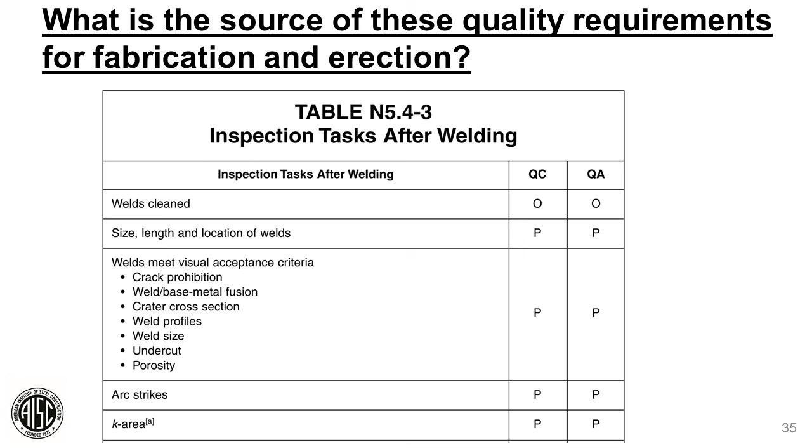I think if you go to the next slide, there's a slide that references what AWS says, and it talks about checking every weld. These are the clauses from AWS. I'm trying to see if I can find this for you real quickly, Brent. I think it's under the perform and observe section. Okay, I apologize, I'm not finding it right away here. Well, I'm looking real quickly too. Bear with me for a second. Okay, that's observe.

AWS D1.1 Clause 6.5.3 says the size and contour of weld shall be measured with suitable gauges. So that's every weld, every weld size and contour must be measured with suitable gauges. I saw the question asked, does two people have to do it? Well, it has to be a quality control. If you go back to that previous slide, the QC was a P and a QA was a P as well. So does it need to be two people? Depends on whether you're doing coordinated inspection or not. But it is a perform task for quality control and quality assurance. So it has to be done twice, whether it's done by one person as a coordinated inspection or whether it's done by two different people, somebody doing quality control inspector and quality assurance inspector.

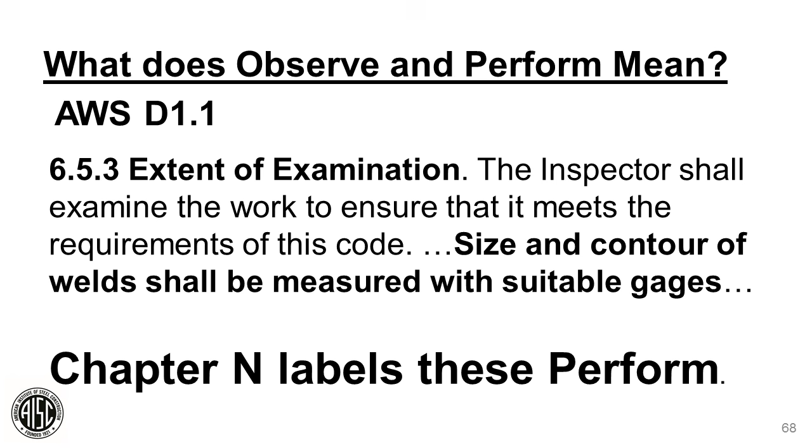Okay, I'm going to go to slide 92. When you discussed the welder identification system, you talked about, quote unquote, you will know if there's a problem or if a change needs to be made with the welder based on the welder identification system. So the question is, who is that person that can make that decision? Is it the owner? Is it the inspector? Are we talking about the fabricator himself?

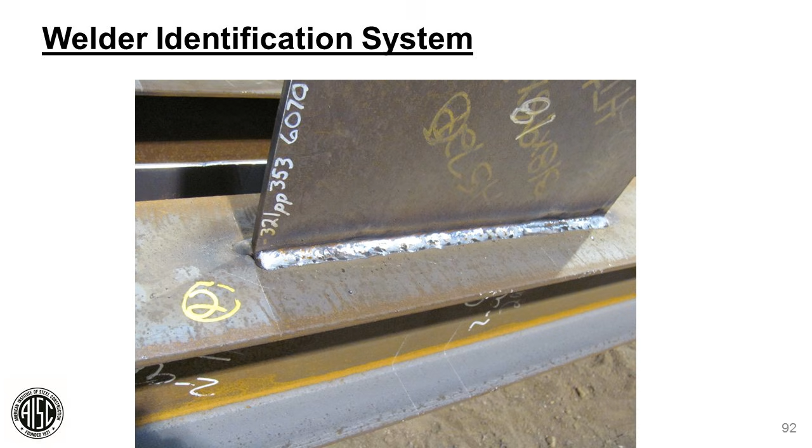All right, very good. Well, that's all the time we have for this evening. If your question did not get answered, we will work with Larry to provide answers and send those out within about a week or so.